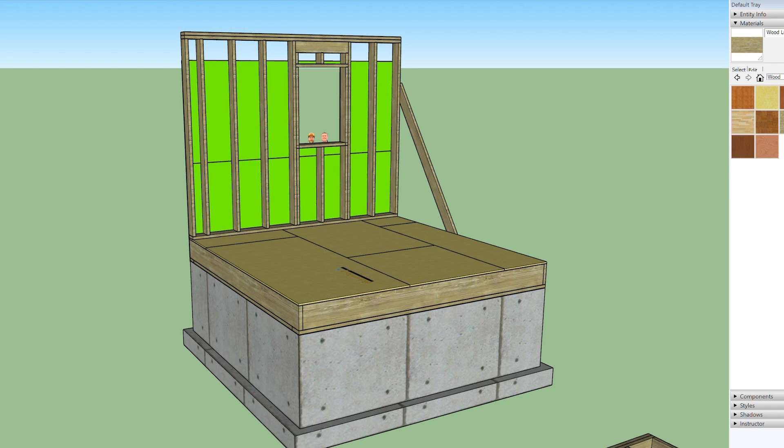The first thing we're going to do is measure 5.5 inches from the edge like we did on the other wall. Then lay the bottom plate for the wall on that line. We know that the wall is 10 feet wide, so we can just use a 10-foot 2x6 or two pieces that connect over a stud.

To figure out our stud length, we know that our ceiling height is going to be exactly 8 feet. This can change depending on whether you use 1/2 inch drywall on the ceiling or 5/8, or maybe you don't care if your ceiling is 8 foot 1/2 inch. For our purposes, our ceiling is going to be 8 feet with 1/2 inch drywall on the ceiling.

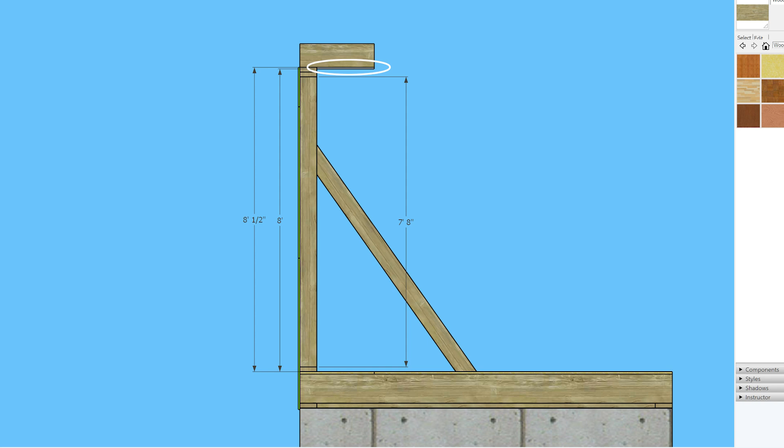So we can calculate 8 feet minus 1.5 inches for the sole plate and 3 inches for the double top plate. Then add a 1/2 inch for the drywall or 5/8 or whatever your ceiling material thickness is going to be. Then place all your studs 16 inches on center except where the windows are going to be.

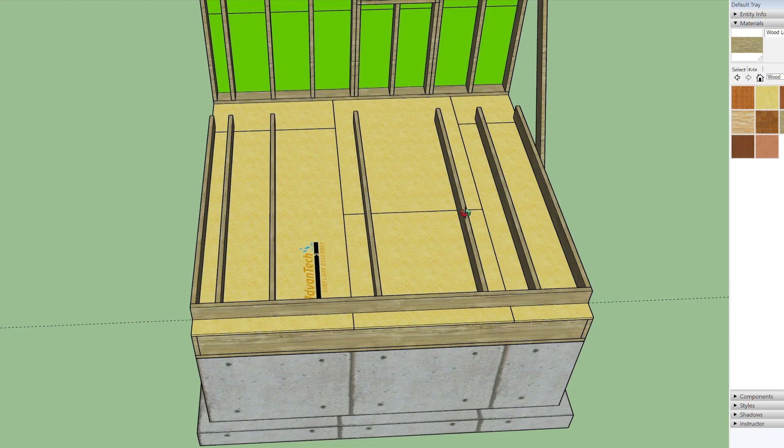We can see from the elevations that this wall is going to have two windows side by side. The rough openings will be 2 feet 3.5 inches and will measure 2 feet 10.25 inches from the right side. Fortunately, this is where our stud is already. What we don't want is for our window to land in the middle of a stud, so we would have to move it over by an inch or so either way.

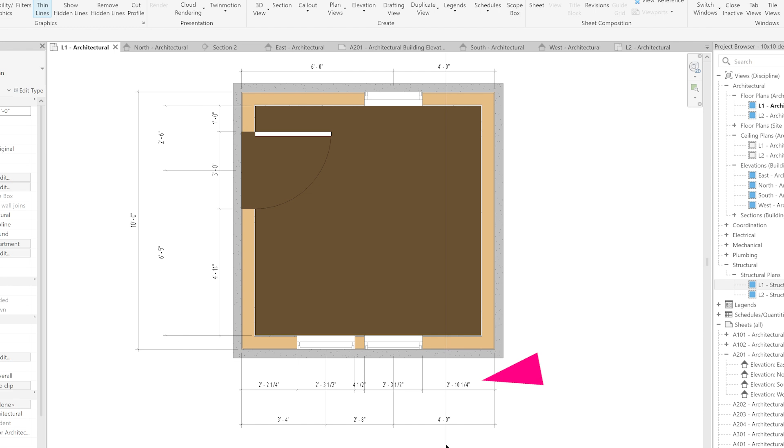The finished wall may not end up perfectly like the plans. You know what they say, plans change. Anyway, figure out your rough openings. It may be helpful to draw lines on the subfloor to make sure everything is going to fit together. First, place your double top plates on the floor. Now we can start framing the windows.

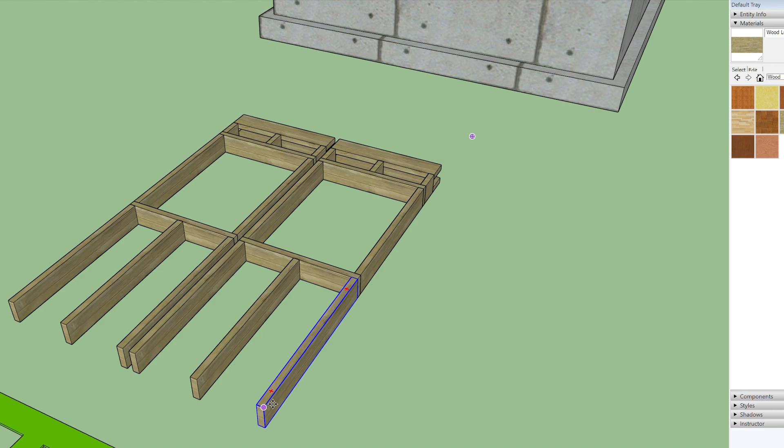If we want our windows to be at 6'8", we can measure up to the point from the bottom of the sole plate and add a 1/2 inch for our rough opening. Then measure down for the height of the window plus a 1/2 inch for the vertical rough opening. Measure down another 1.5 inches for the window sill.

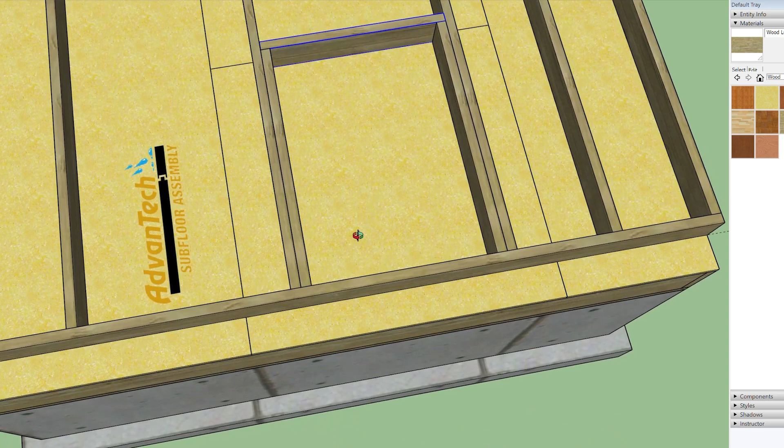We know that the cripple under the window measures 3 foot 3.5 inches, so cut 6 pieces at that length for the two windows. The width of the windowsill is going to be 2 foot 6.5 inches. Cut 4 of those and lay one in place. Then place the jack studs above the windowsill. There are other ways to frame windows. This is just how I do it.

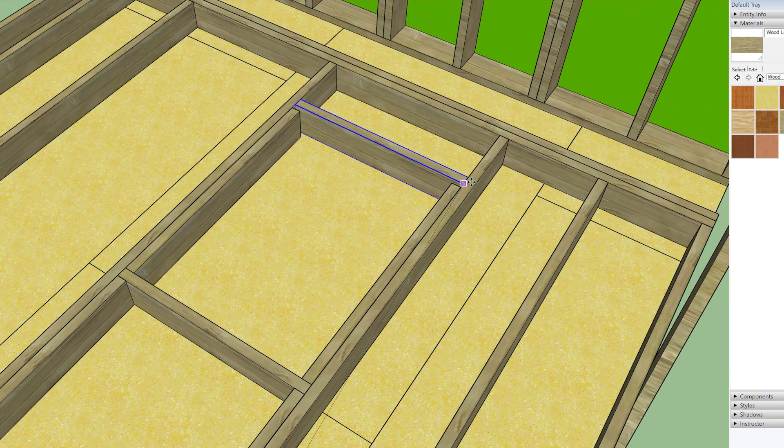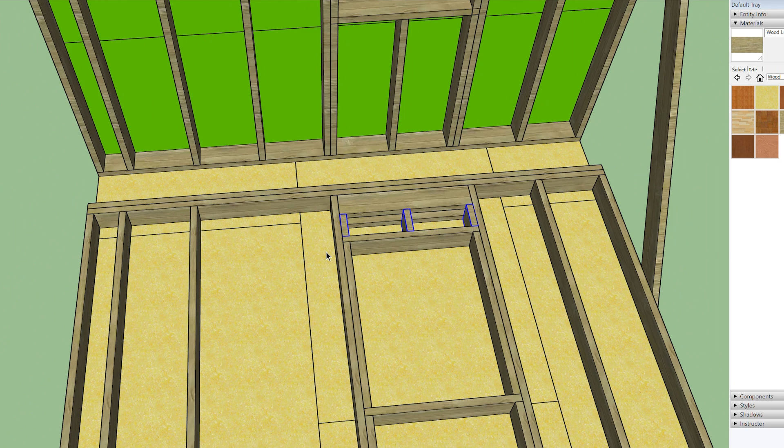Then lay one of the sill pieces you cut above the window opening. Now you need 2 or maybe 3 headers the same length that go just under the top plate. Now you'll need 3 short cripples on top of the window rough opening. Make sure they are on your 16-inch stud layout. Now you can frame the second window exactly the same.

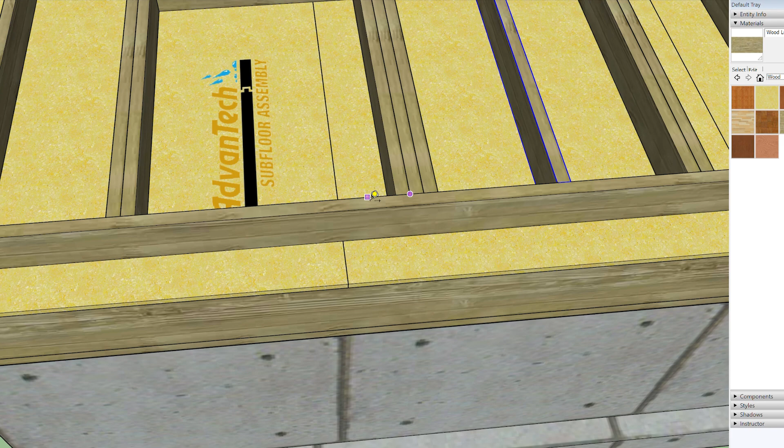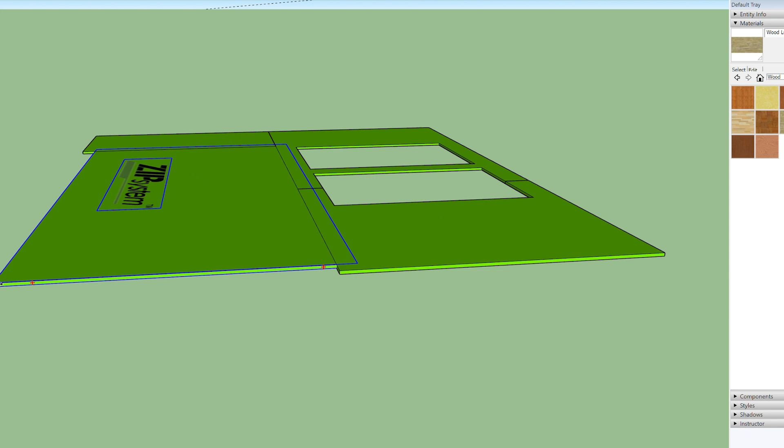Then add 2 cripples below the window that you cut previously. Make sure they are 16 inches on center. And if everything fits, you can nail everything together. Now lay your first sheathing board 12 inches below the bottom plate, just like the other wall. Cut a piece to fill the gap on the end.

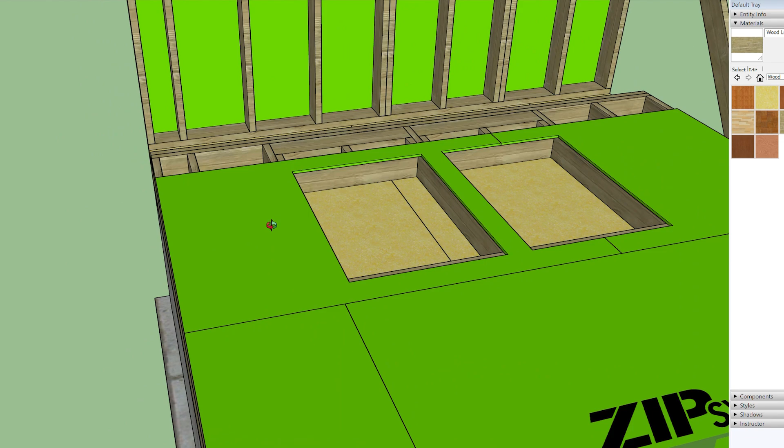You can cut holes for the windows before attaching them to the studs, but we will see why this is not a good idea. As you can see here, I cut the holes wrong. I can either recut a new board or I can cut a 1.5 inch strip to fill the gap. I'm not sure how that happened. Easy for me to fix.

I will put sheathing on the upper part of the wall after the rafters are installed. Now we can stand up the wall and attach some bracing.

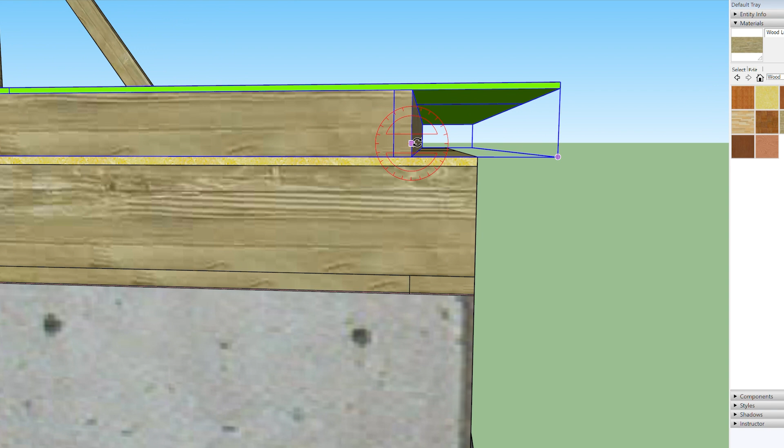I see those guys are still hanging around. Creepy.